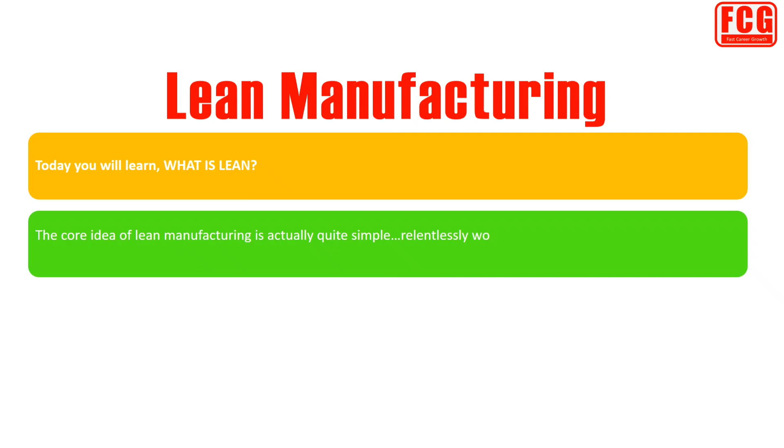Today you will learn, what is lean? The core idea of lean manufacturing is actually quite simple: relentlessly work on eliminating waste from the manufacturing process. So what is waste? Waste is defined as any activity that does not add value from the customer's perspective.

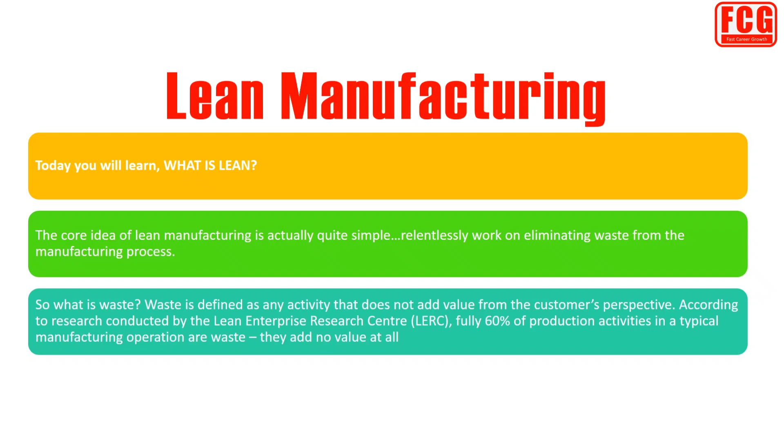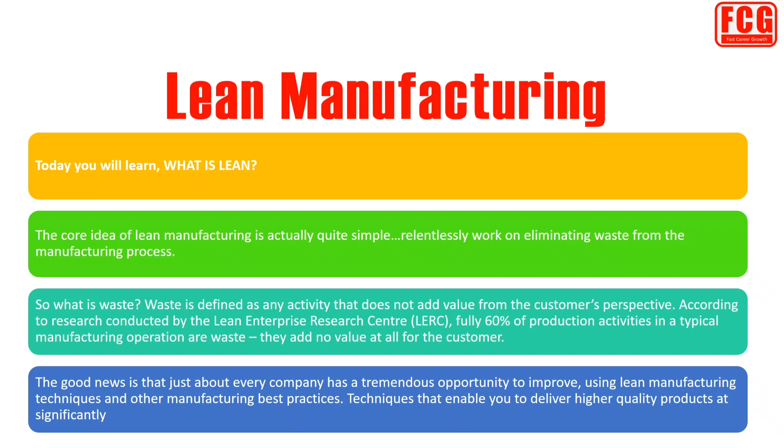According to research conducted by the Lean Enterprise Research Center, LERC, fully 60% of production activities in a typical manufacturing operation are waste. They add no value at all for the customer. The good news is that just about every company has a tremendous opportunity to improve, using lean manufacturing techniques and other manufacturing best practices. Techniques that enable you to deliver higher quality products at significantly lower costs. Now that is something to get excited about.

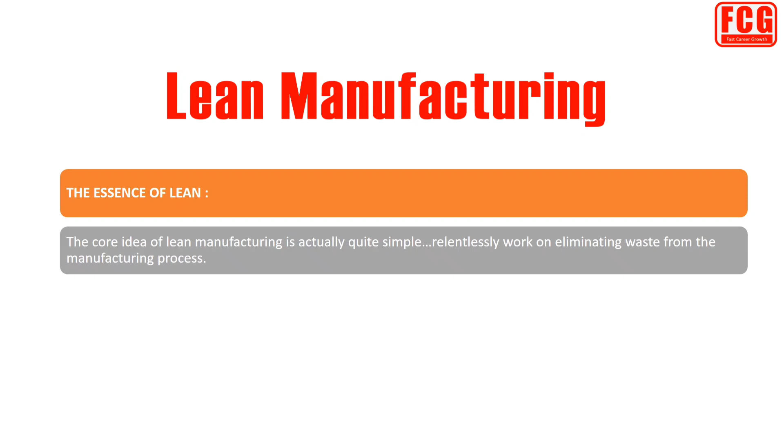The essence of lean. The core idea of lean manufacturing is actually quite simple: relentlessly work on eliminating waste from the manufacturing process. So, what is waste? It can take many forms, but the basic idea is to eliminate anything and everything that does not add value from the perspective of your customer. Another way to look at lean manufacturing is as a collection of tips, tools, and techniques, i.e. best practices, that have been proven effective for driving waste out of the manufacturing process.

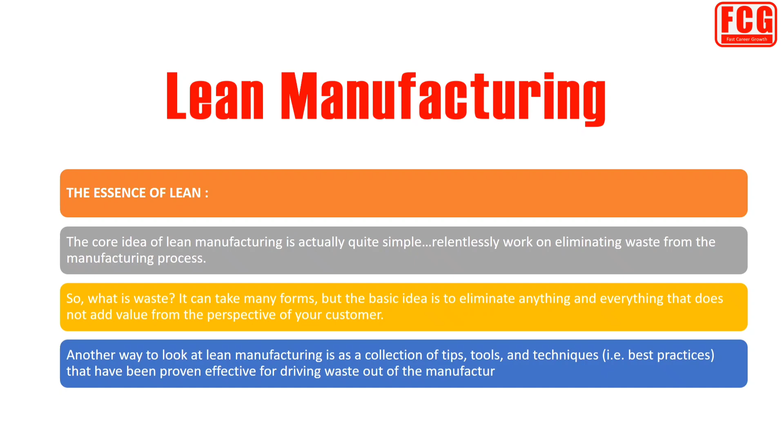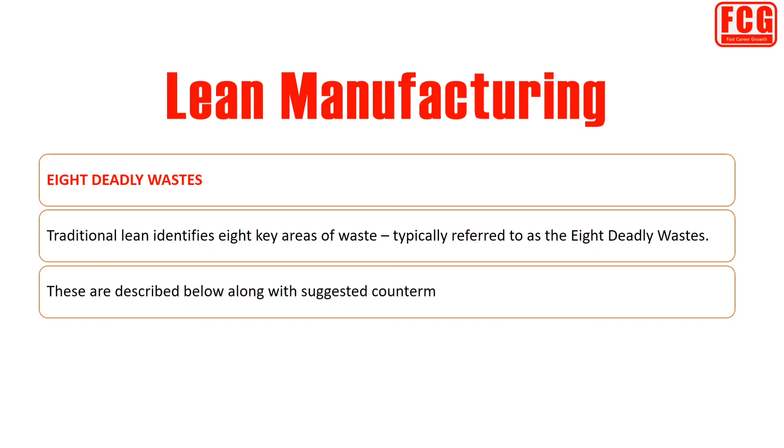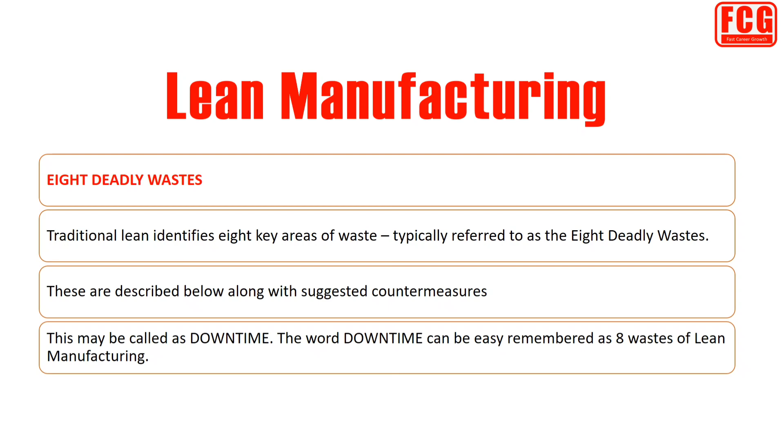8 deadly wastes. Let's talk a bit more about waste. Traditional lean identifies 8 key areas of waste, typically referred to as the 8 deadly wastes. These are described below along with suggested countermeasures. Don't worry if the countermeasures are not immediately actionable for you. Right now they can be considered simply as a roadmap for the future. This may be called DOWNTIME. The word DOWNTIME can be easily remembered as the 8 wastes of lean manufacturing. So let's learn one by one.

First is defects. Production that is scrap or requires rework. Countermeasures are Poka-yoke, design processes so they are less likely to produce defects. Jidoka, design processes to detect abnormalities so they can be immediately corrected. Root cause analysis, look for the single most frequent defect and determine why it occurs. Standardized work, create work instructions that provide a consistent method of manufacturing the part.

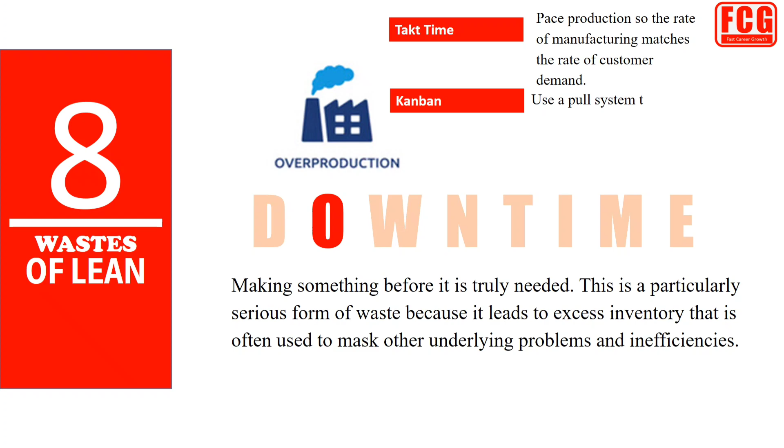Next is overproduction. Making something before it is truly needed. This is a particularly serious form of waste because it leads to excess inventory that is often used to mask other underlying problems and inefficiencies. Countermeasures are takt time, pace production so the rate of manufacturing matches the rate of customer demand. Kanban, use a pull system to control how much is manufactured. SMED, reduce setup time so that smaller batches can be economically manufactured.

Next is waiting. Time when work in process is waiting for the next step in production, no value is being added. It can be truly illuminating to look at the time from order to shipment and ask, how much of that time is actually spent on true value-added manufacturing? Countermeasures are continuous flow, design processes so that the flow is continuous and there are minimal, or no, buffers between steps in production. Standardized work, use standardized work instructions to ensure that a consistent method and consistent times are used for each step of production.

Next is non-utilization of talent. Unused human potential often results from management policies and management styles that diminish employee contributions. By way of contrast, developing strong coaching skills for managers can be very effective in strengthening employee contributions. Countermeasures are performance metrics, job rotation and cross-training.

Next is transport. Unnecessary movement of raw materials, work in process, or finished goods. Countermeasures are value stream mapping, design a linear, sequential flow from raw materials to finished goods. Continuous flow, make sure work in process is not placed into inventory. Theory of constraints, avoid continual changing of job priorities.

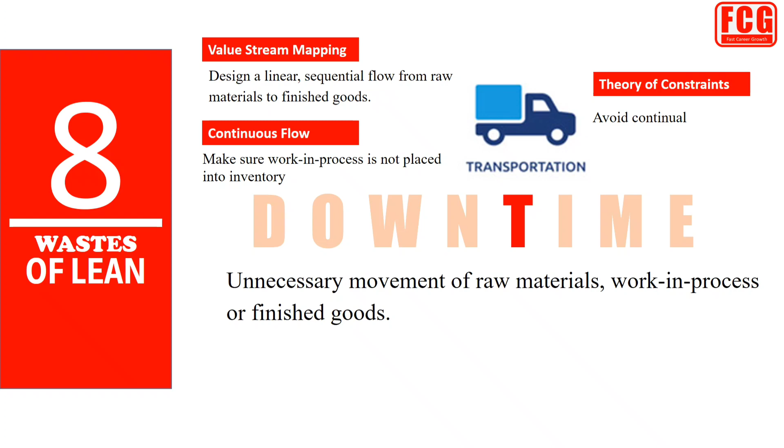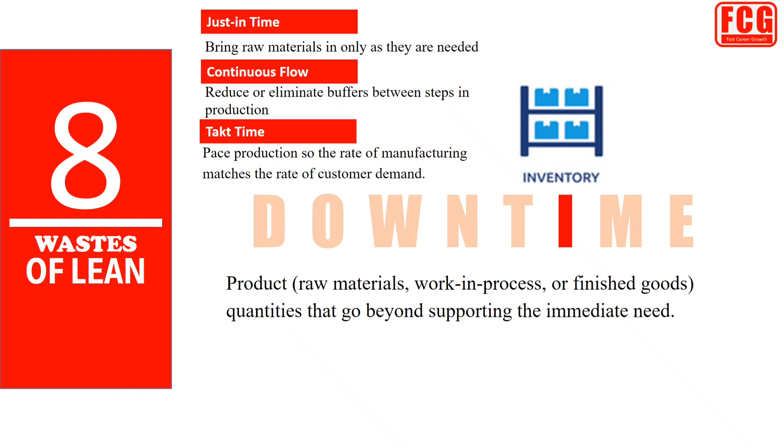Next is inventory. Product, raw materials, work in process, or finished goods, quantities that go beyond supporting the immediate need. Countermeasures are just in time, bring raw materials in only as they are needed. Continuous flow, reduce or eliminate buffers between steps in production. Takt time, pace production so the rate of manufacturing matches the rate of customer demand. Kanban, use a pull system to control how much is manufactured. SMED, reduce setup time so that smaller batches can be economically manufactured.

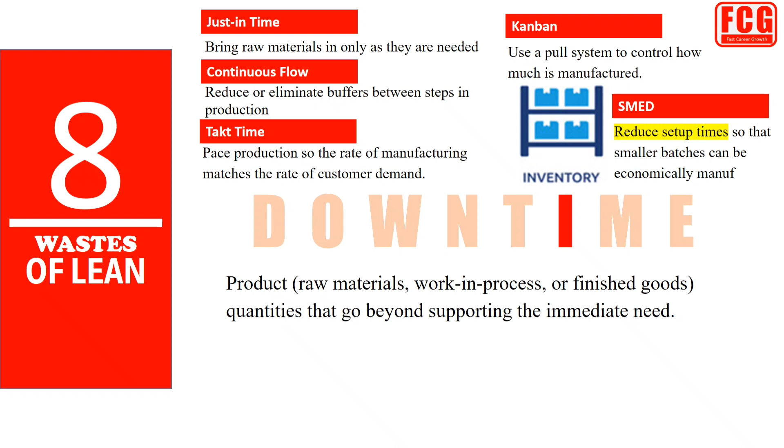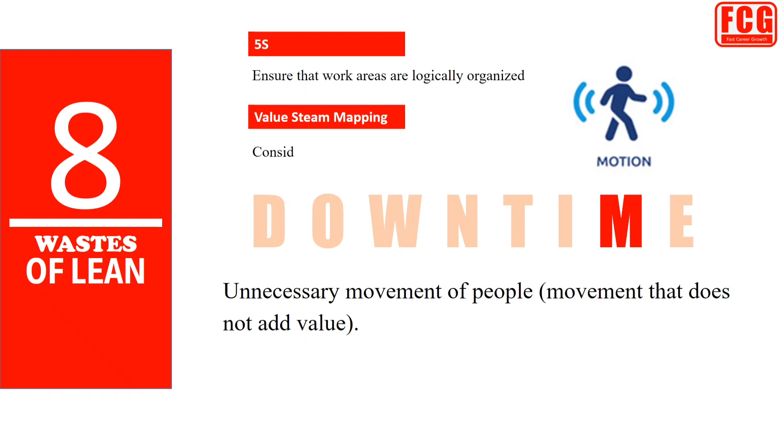Next is motion. Unnecessary movement of people, movement that does not add value. Countermeasures are 5S, ensure that work areas are logically organized. Value stream mapping, consider alternate arrangements of equipment that reduce motion.

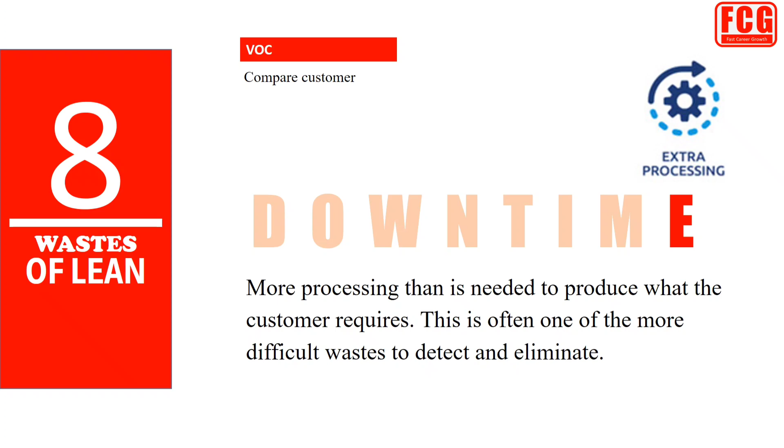Next is extra processing. More processing than is needed to produce what the customer requires. This is often one of the more difficult wastes to detect and eliminate. Countermeasures are VOC, meaning voice of customer. Compare customer requirements to manufacturing specifications. Kaizen. Look for potential simplifications.